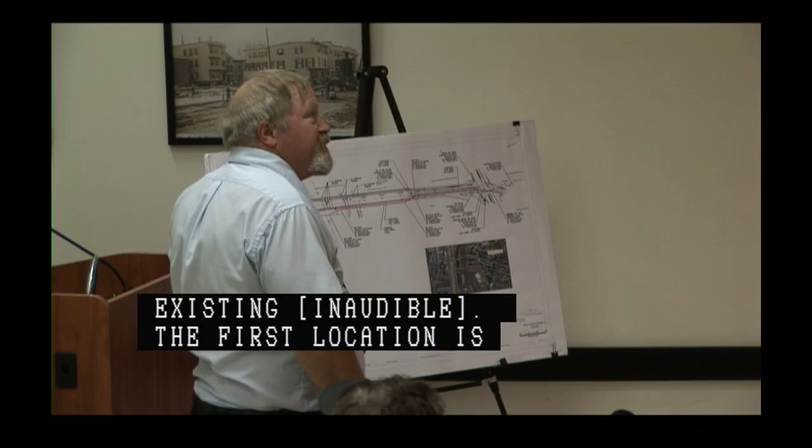This project is replacing existing duct banks that are failing. The first location is West 4th Street. We're going to be going from City of Boston property all the way down to Dorchester Ave.

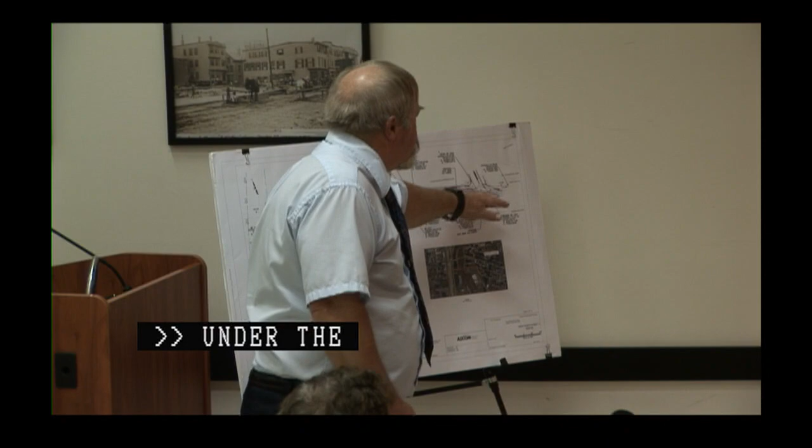No, it's all underground, on the bridge, under the bridge. And you have Mass DOT approval on the attachment? Yes, we've coordinated with District 6.

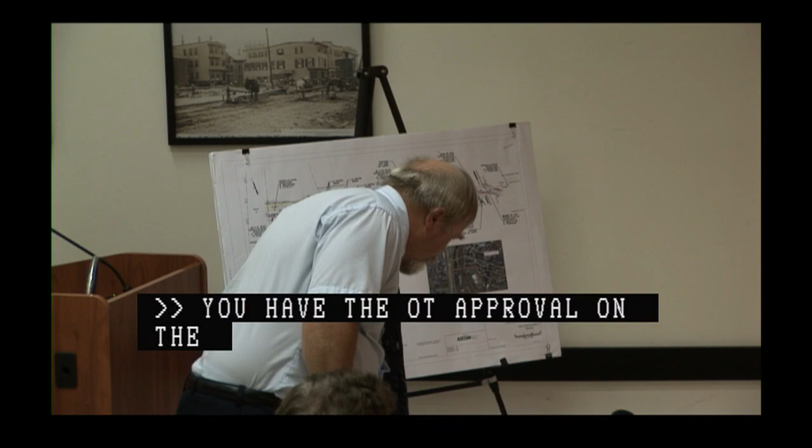I think last time there was some confusion about what was happening with this, with the old line, but this is actually adding additional capacity, and they're still occupying the existing duct bank. So it's not a duct bank replacement, it's a duct bank addition. So basically, the approval that they're seeking here is just for the intersection of West 4th and Dorchester Avenue.

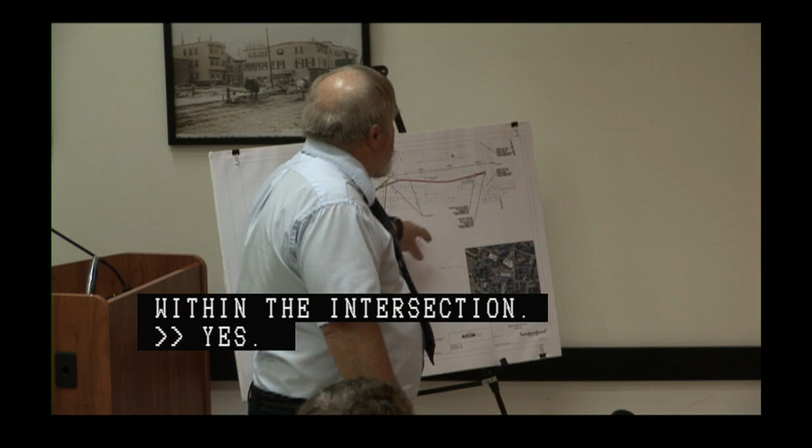Second location is in Dudley Square. Coming off of Orange Street, going through the bus facility, and then Roxbury Street, up to Malcolm X Boulevard.

I know we just discussed this last time, and you've been in coordination, but just as a reminder, just stay in coordination with the city's Dudley Phase 2 project. I've been coordinating with Joe Vazella, and I'll remain coordinating with him through the work. Perfect.

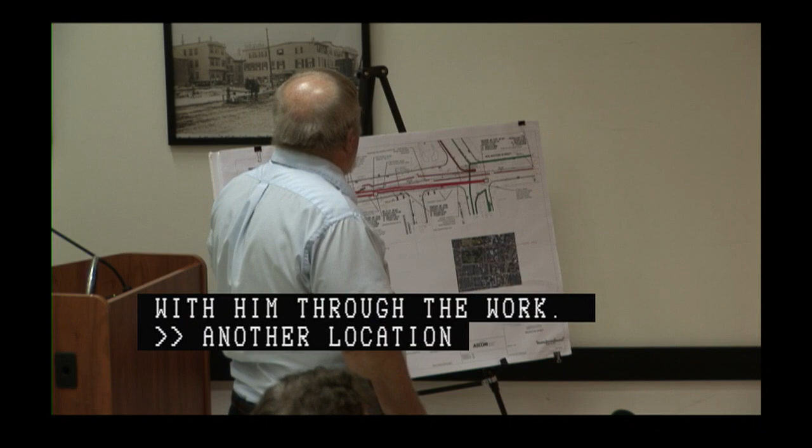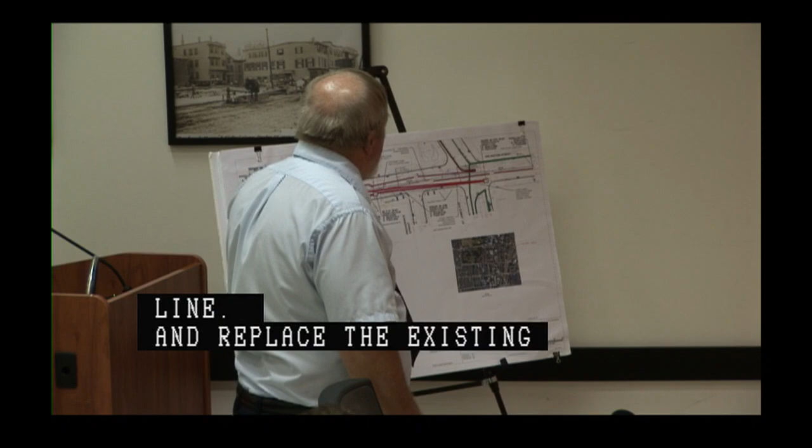And in this one, sorry, the old duct bank is going to have no more cables in it? No, the old duct bank will be used, yeah. The engineer last week misspoke. That's gonna be extra capacity that's needed out in that area.

Right, and if there, for any reason, chief, if a duct bank does become abandoned, they've been instructed to remove it, yes. Great, thank you.

So the duct bank that was just installed is a temporary measure, that will still be utilized? Yes, for the extra capacity. But if any duct bank does become abandoned, they will have it removed.

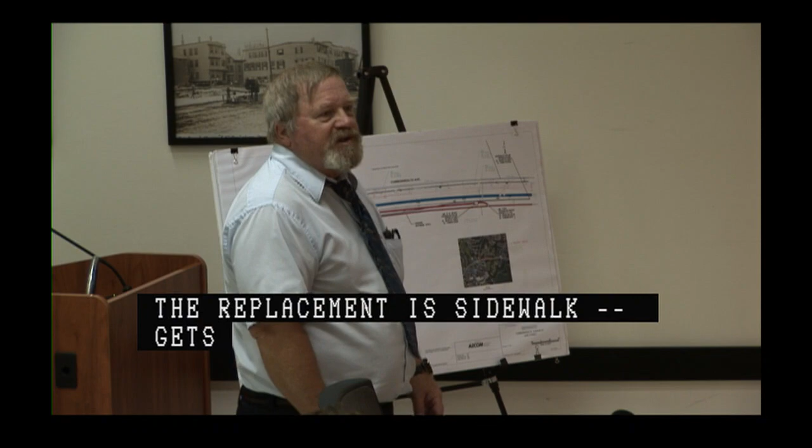I know we talked about this separately, but can you talk about the number of other duct bank work the MBTA does or doesn't plan on doing in 2019 and beyond? Right now, the next phases of duct bank work is under review up at the chief engineer's office, so it's under the planning phase right now. Design hasn't started, even conceptual. As soon as that goes into the queue, I will contact you and give you that list. But for 2019, you should not see us back here with any duct bank projects. Very good.

Other question? Go ahead, sorry. No question? The fifth location is Commonwealth Ave at Washington Street.

Coming out of the existing manhole intersection, going out from under the tracks right now, because under the tracks, between the tracks, we're gonna pull it out to the side, go down in this hardscape, landscape area, back in.

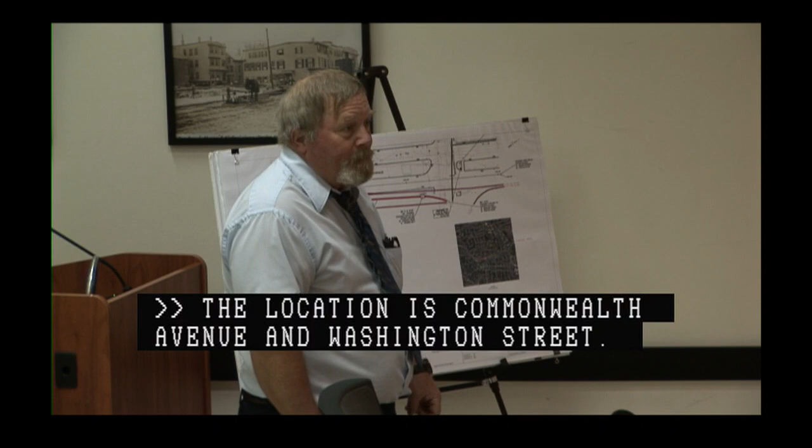So, with this work, is this being coordinated with the track crossings work that we're currently underway? Yes, so we've thought about that and when we're gonna be able to do this versus where you're gonna be. Yes, and I've met with Don Burgess and Al Wilson. I've met with them on both projects, grade crossings and the duct bank.

But I just wanna make sure that internally the T's aware. Yes, absolutely, absolutely. And Jim's, I know you are, Jim, but Jim has been, Jim's one of the directors, he's got both projects under him, so Jim's well aware of both of them. And the same contractor. Perfect.

Jim, you got your work cut out for you. And the last two sheets are the details that were in that set of 10, duct bank configuration and such.

Questions? Questions or comments? So we've sat down with the team and we've come up, went over the construction management plans, hours of operation and stuff, and we're pretty comfortable with what we've come up with. I think there's been a lot of flexibility on the MBTA side, and I appreciate that. And thank you, Eddie, for all your help too, I appreciate it. I know you guys got a lot going on.

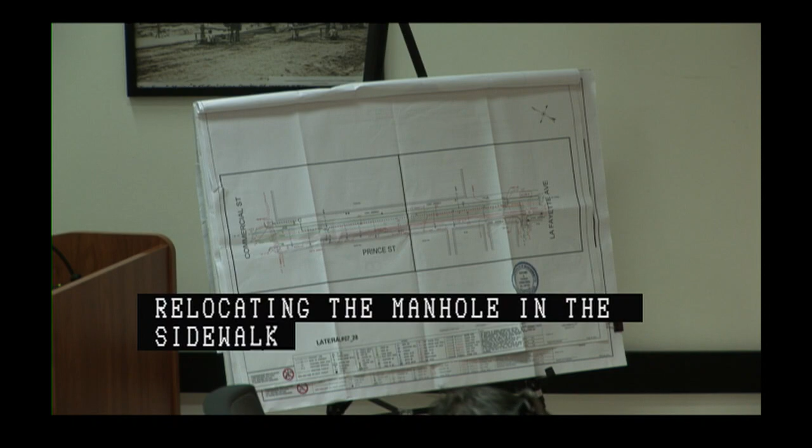Good morning. Chris Murray with the Giamari Group, representing Crown Castle for grant of location on Prince Street. At the July 25th new business meeting, we were asked to look into relocating the manhole in the sidewalk area, as shown on the plan here. After we looked at it more closely, the manhole could not be moved due to a large gas line that runs right next to it in the curb line. So it was agreed that we would keep it there.

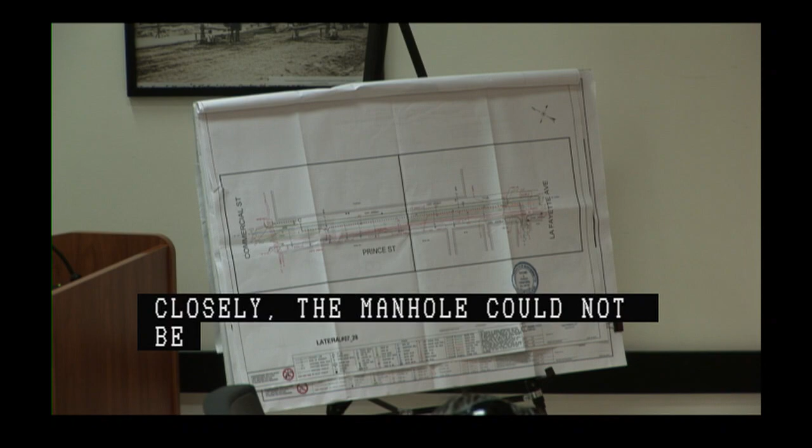Thank you for reviewing that. What's your proposed schedule on this? I don't think we have a schedule yet, but once we get the okay from the department, someone will be down to talk to your department about getting permits. Just keep in mind, for the month of August, the feasts going on in the North End make it pretty much a no-fly zone right now. Gotcha. Make note.

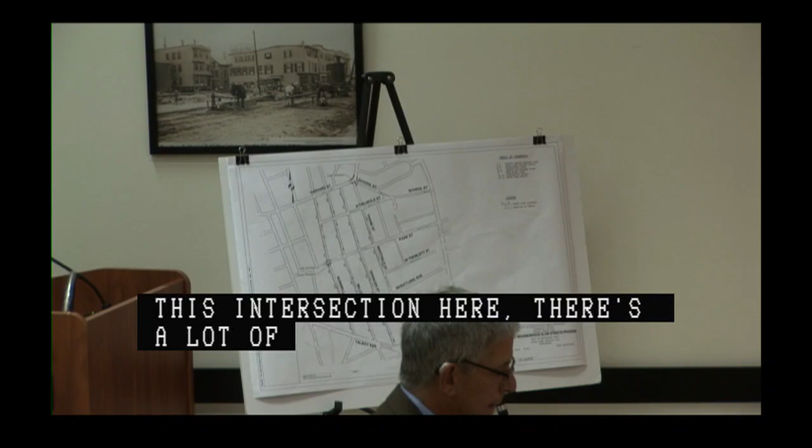There's a lot of pavement at that intersection, and the geometric improvements are meant to try to improve that. There's a raised crosswalk at the intersection of Norwell Street and Park Street. So those are the proposed improvements for the west of Washington neighborhood.

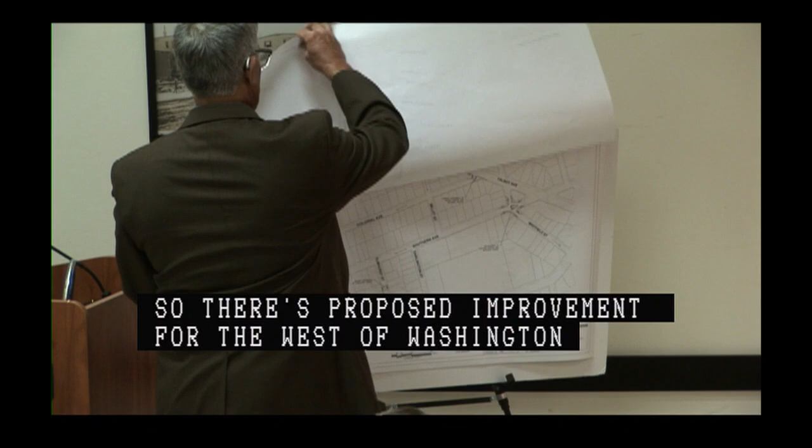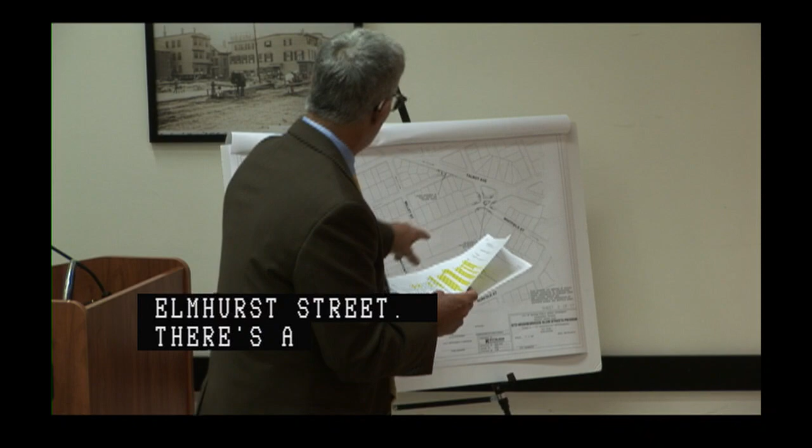We're also proposing improvements for the Talbot-Norfolk Triangle neighborhood. We're proposing a raised crosswalk at Elmhurst Street - there's a park near there - a raised crosswalk and curb extension at Colonial and Talbot, and then a roundabout at Whitfield and Southern Avenue.

So those are the extent of the improvements being proposed. At the last meeting, there were some questions raised that we'd like to address - why some of these are permanent improvements, and it's really for a couple reasons: maintenance, durability, accessibility. For example, where the curb extensions are, we're trying to put the pedestrian out a little bit further into the street in a protected manner, and if you put in temporary fixtures, they're really not as protected as they would like to be or expect to be. And then there's the community expectations from an aesthetic standpoint.

We will evaluate the changes one year after installation, both in terms of the anticipated speed reductions. As Stephanie said, we're trying to get down to 20 miles per hour, and we'll evaluate to see how effective they are. We'll also do in-field observations to see how all of the users of the system will be using them, whether there's any issues with fire trucks or delivery vans, those kind of things. And then we'll collect this information and prepare a memo as to the findings.

What's your quantitative analysis? How are you going about that? Well, the quantitative analysis, as Stephanie said, what we're trying to get to is 20 miles per hour or lower, particularly in the areas where the speed humps are, and we'll see what the 85th percentile speed is relative. We did that beforehand, and we'll do it afterwards.

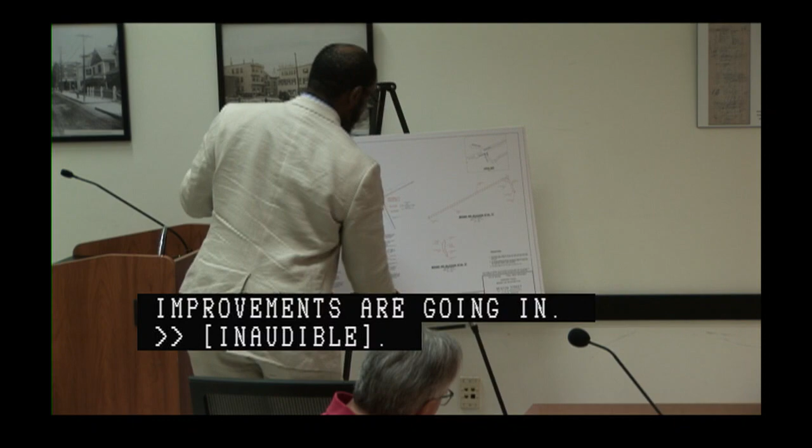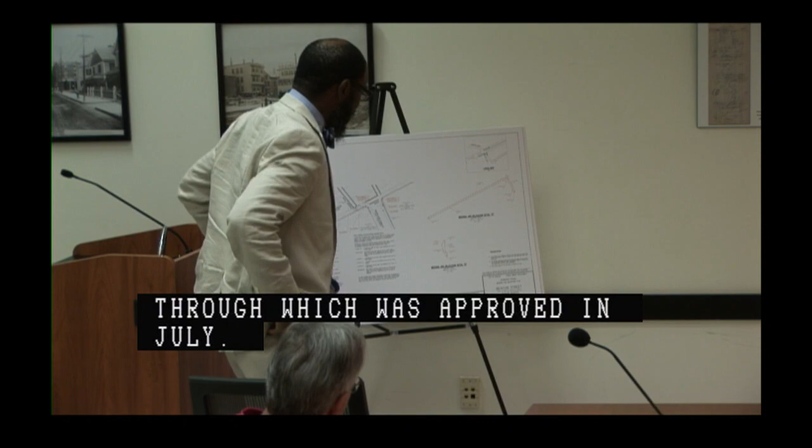I'll start with the widening. As I noted, we worked with BTD from conceptual design all the way through PS&E, which was just recently approved in July, to install signalization equipment on Beacon Street for this intersection. For the widening, there is a 45-foot mast arm at the corner of Beacon and Maitland Street on the Fenway Center / Mass DOT portion of the parcel, which is also within the area that was approved last year as our pedestrian easement.

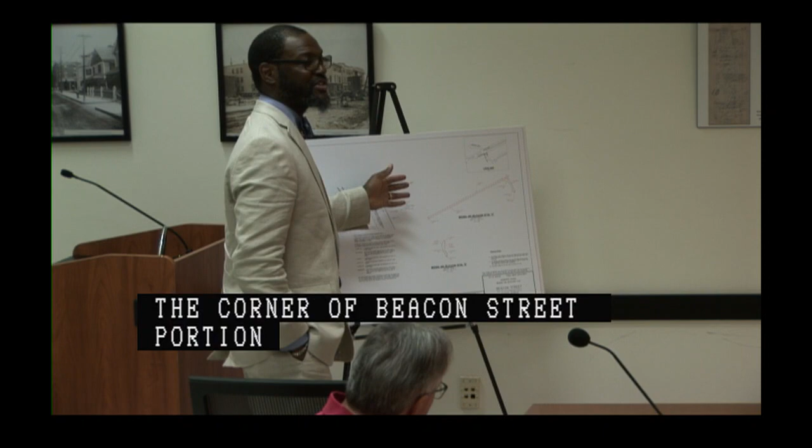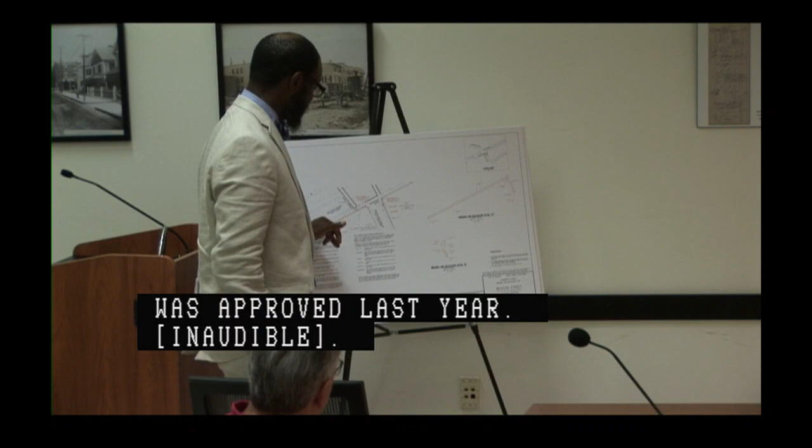In order to put the equipment at this location, we were told to widen this corner to allow for that signal equipment to go into place. On the west side of the Maitland Street intersection, there's a section for widening at every location, approximately 2 feet from every 121 feet, to allow for conduit and 2 traffic signal posts to go into this intersection.

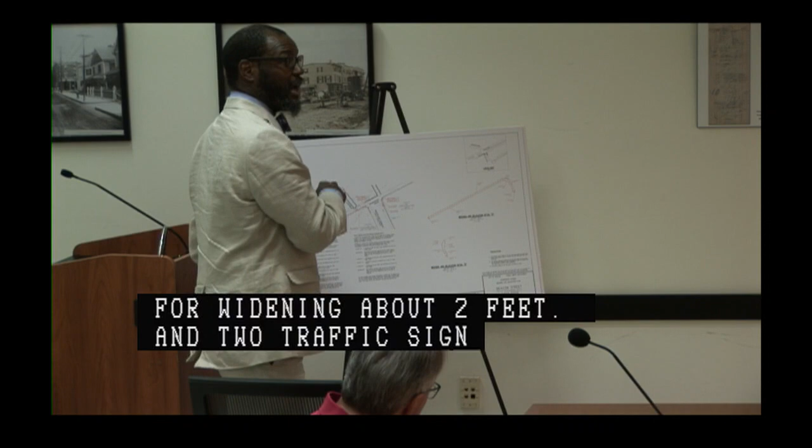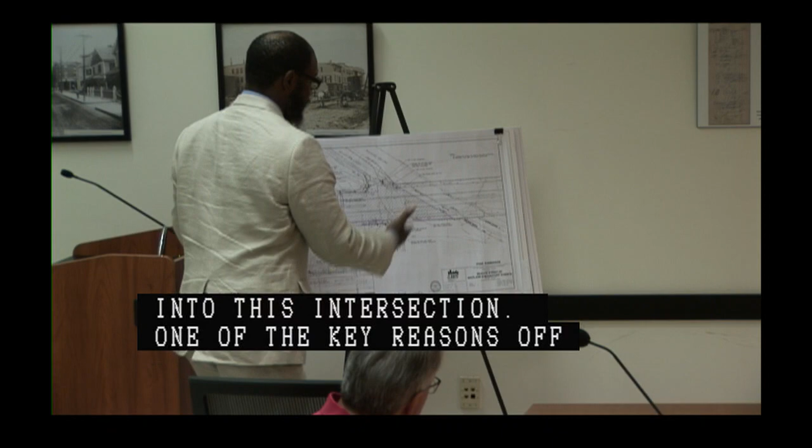One of the key reasons we have to locate this equipment off the road is that there's a vaulted bridge support, which we've coordinated and talked with BTD about extensively. You can see it highlighted here supporting the bridge—it's 2.5 inches below the surface. So we've got our signal equipment located just outside of that because of the foundations required for the pedestrian post, the traffic signal post, and the mast arms, which have the deepest foundation. That's why these two posts are located outside here, because the vaults come right up at this point in the sidewalk.

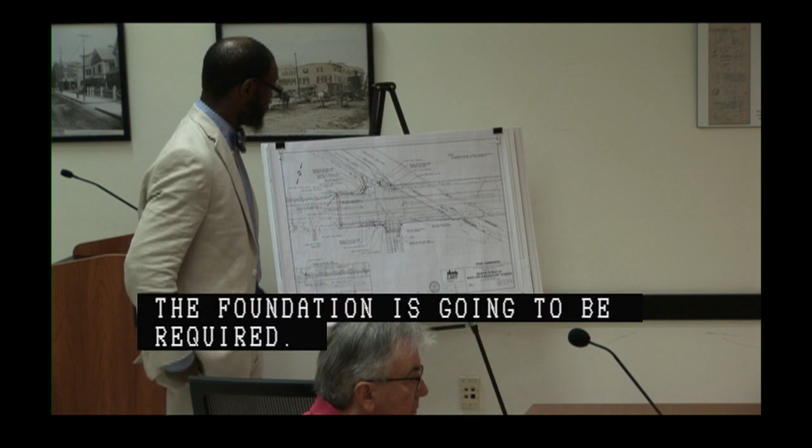You talked to MassDOT as well about it? Yes.

Perfect, great. And the discontinuance for the conduit, are property owners on board with that? Yes, we have signatures from all granting parties. That was Children's? Yes, Children's has a signature. I believe there's a highway easement document that goes along with this that's supposed to be worked out with the city.

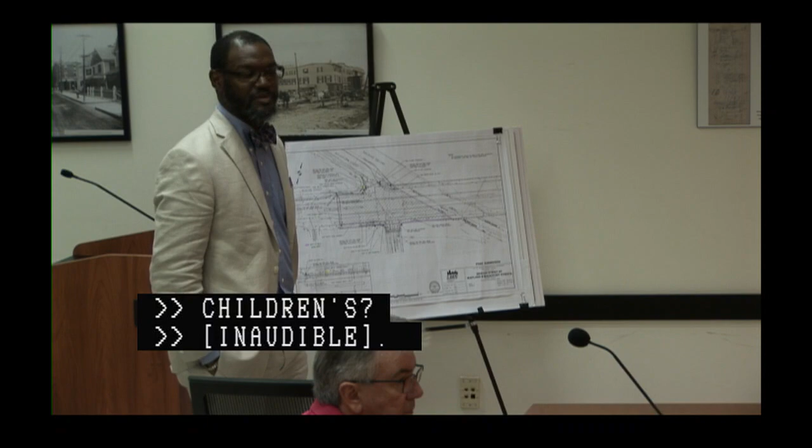And then you talked to the specific repair—I know you covered some of it, but just walk through the pieces.

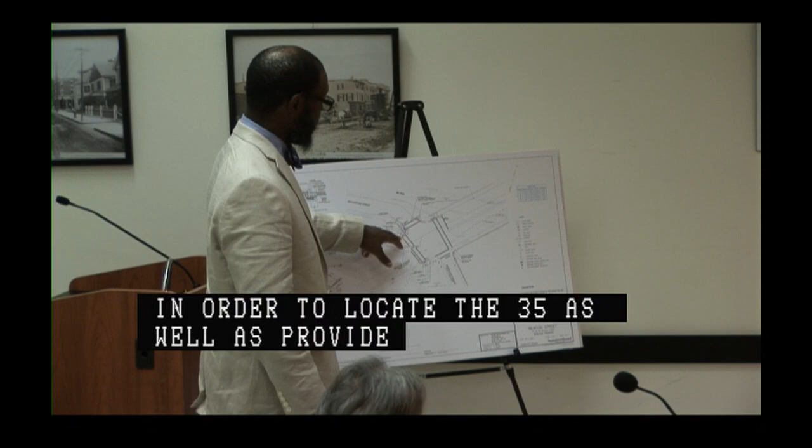For the specific repair, I'll start on the north side of the intersection. In order to locate the 35-foot mast arm, as well as provide adequate accessible ramps and pedestrian signal head posts, we have to build out the corner of this intersection property about 10 feet or so, in order to put 2 accessible ramps at that location.

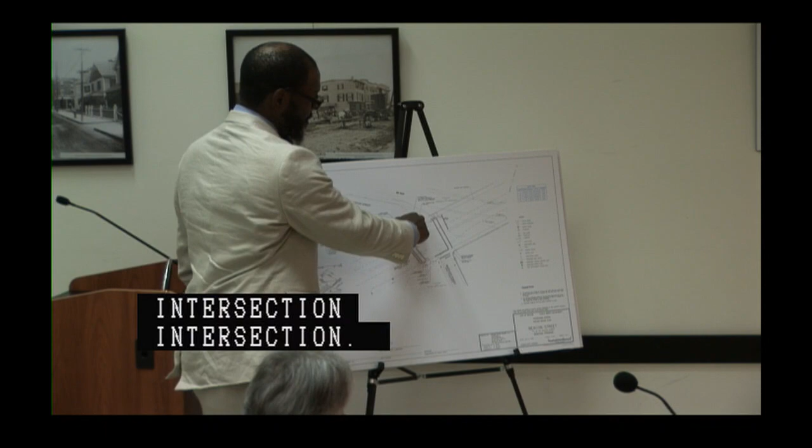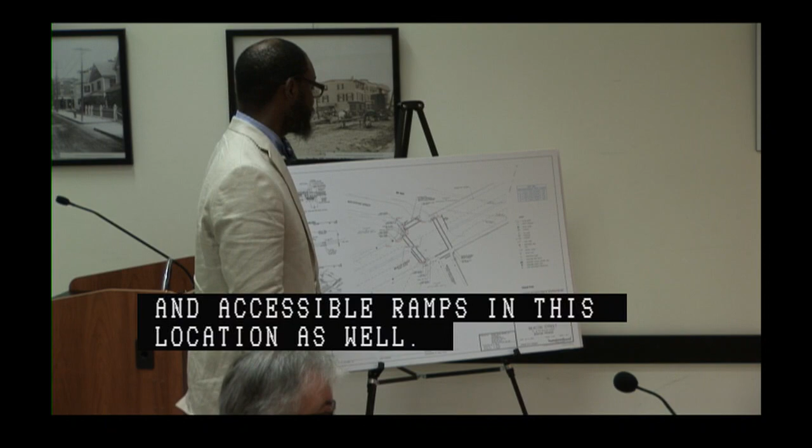This is an existing crossing at this location. We're going to be putting in accessible ramps here, and accessible ramps to get us across Beacon Street at this location as well. We met with the street lighting department, and they've approved relocating this street light. They've asked that we put in a brand new concrete pole and coordinate with them, as well as use the same type of lighting fixture that's out there now when we relocate.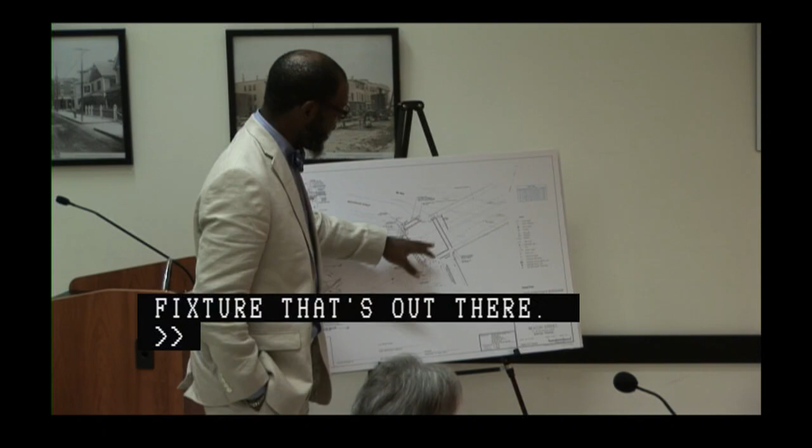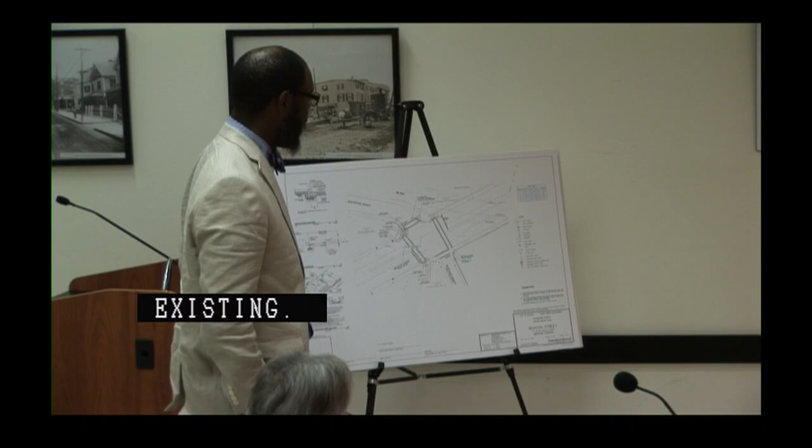As you go east, we've added an accessible ramp on this side as well, and this will bring us to an accessible ramp that's already existing—built under a variance with the AAB back in 2013. So we're not touching those two ramps, as they're already constructed, built, and approved, and we're tying into that location to connect them across the side of Beacon Street.

And then this will be brand new ramps for this crossing on the western side.

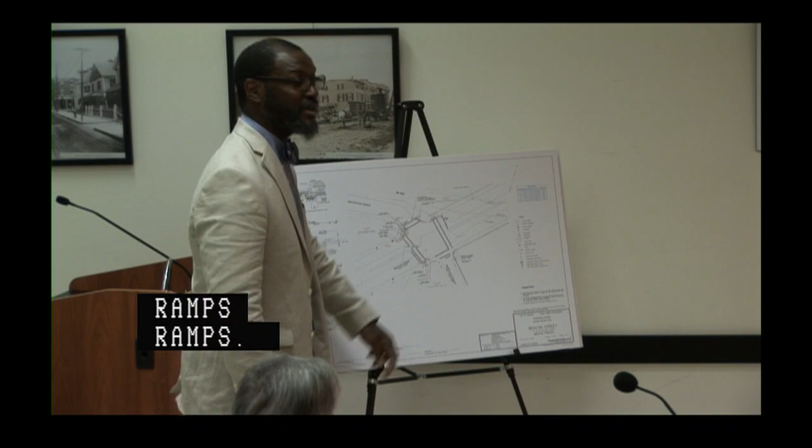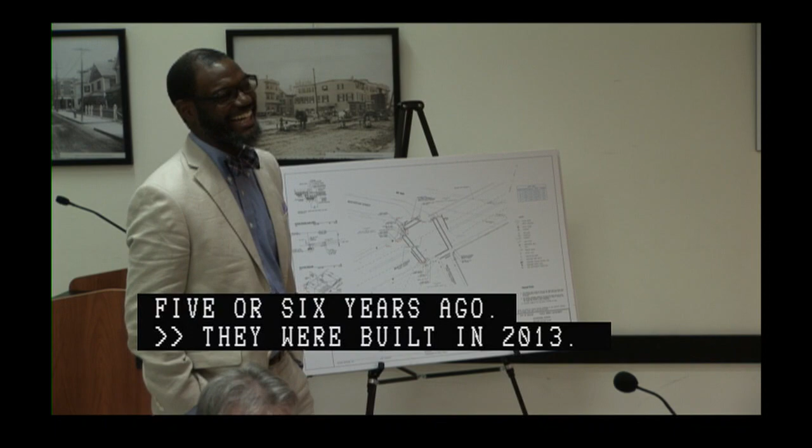Do we know if the two ramps framing Maitland are still in compliance? I know they were probably just rebuilt 5 or 6 years ago, but are they? Yeah, these ramps were built in 2013 and are still compliant with the variance. It's not compliant, but it has a variance—right, for it's not compliant, yes. I'm wondering, as good as it can get with the appropriate variance, if there's been any degradation since 2013 while we're doing some work. Is there a way we can just verify that it's not cracked and the panel's still up there? We'll talk with construction. Terrific, thanks.

Just in the installation of the signals, that's mitigation for the new project. Obviously, we're going to be having a lot more pedestrians in the area, not only with the Fenway station, but a lot of people have been walking mid-block out here, so this is an attempt to get a safe signalized crossing in here, and we appreciate the work that you did here.

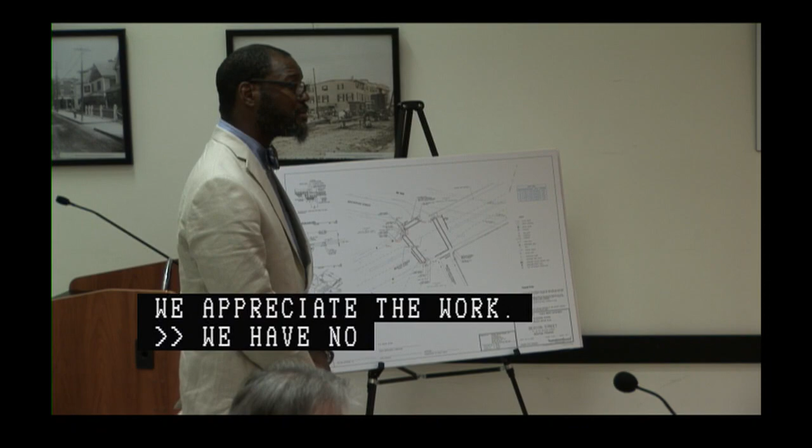We have no issues with the work. Some of our facilities were labeled incorrectly, I can send you that information, it's just for cleanup purposes. Sure, I did see your comment about the sewer. No, it's all right. You know what it is? It's our covers are labeled incorrectly, so if it says it's sewer, it still may be a drain line. That's what the issue is. That's all, thank you. No problem, we'll get that straightened out.

Kevin, you just connect between now and new business on the location of the traffic control cabinet, just to make sure it's in the optimal place for BTD to maintain the signal over time. Probably have it back at the sidewalk, not up at the front face. Okay.

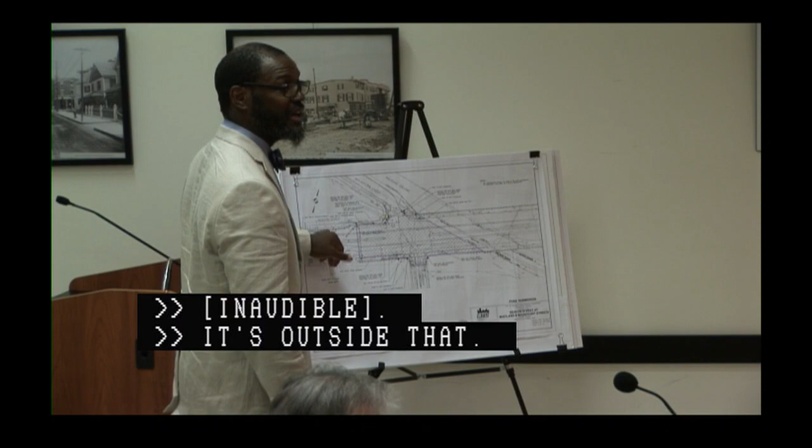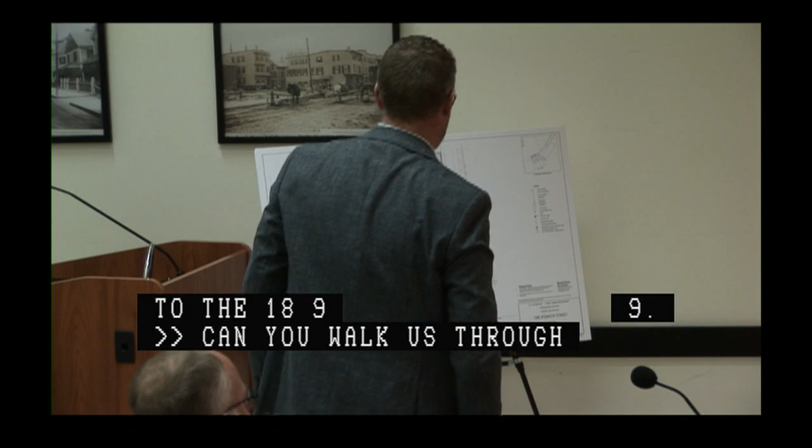Can you walk us through both of the specific pieces, the licensing and the curb cut? Sure. So I'll start with the specific repair plan. Today there is approximately a 21-foot curb cut on Ipswich Street, and we're proposing to widen it to a 30-foot wide curb cut on Ipswich Street. This would be done where the concrete and the pedestrian traffic path has the priority.

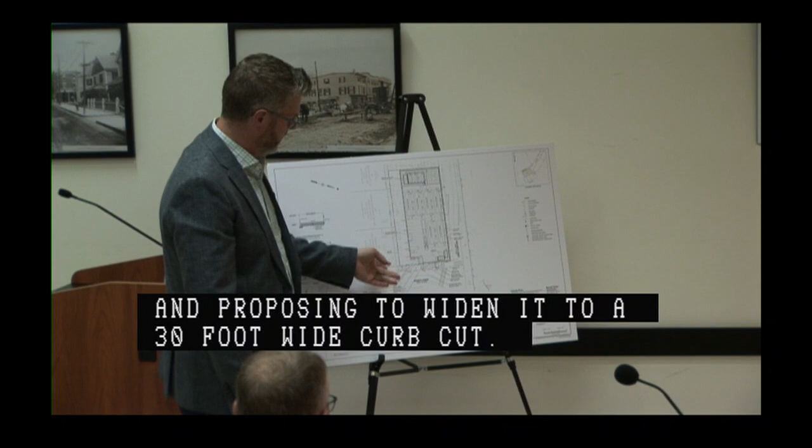Based on comments we received from BPDA staff, they had also asked about an existing curb cut to the south of the one we were specifically talking about, and today that is asphalt, and they had asked that we replace the asphalt with concrete to give the pedestrians priority. And again, the need for the widening is due to the large trucks that are going to be using the lot for that.

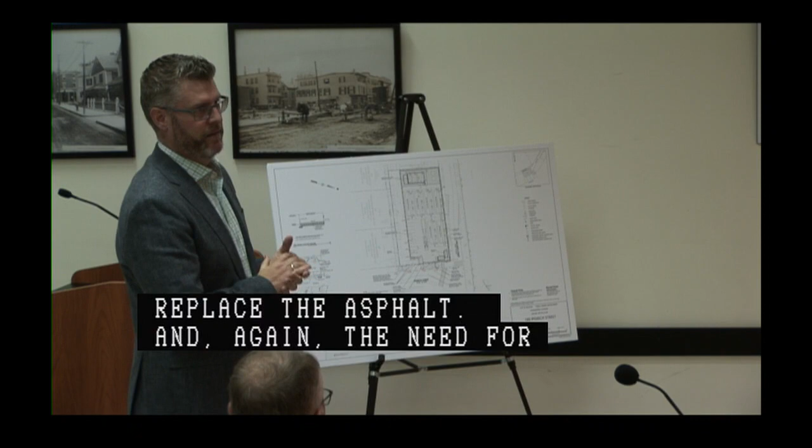Now, are there grade changes to get those vehicles into that lot? There won't be any grade changes in the public way. It's going to have the city standard driveway apron that goes up to the sidewalk. The sidewalk itself will grade from the back of the sidewalk to the street as it does today.

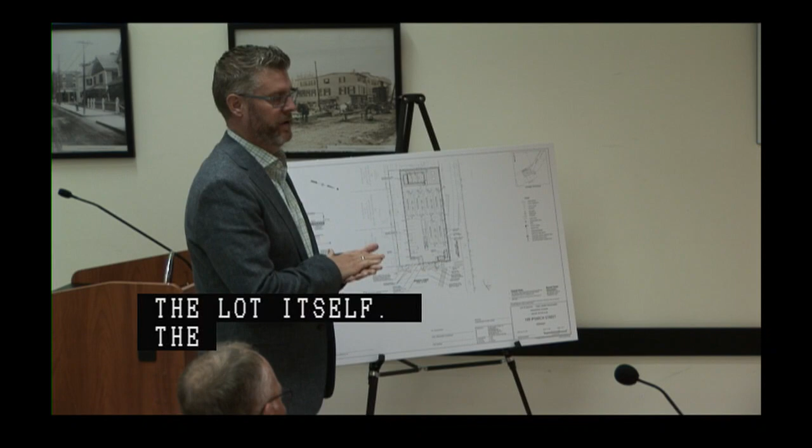There will be grade changes to the lot itself. Today, the lot dives down very steeply. In the proposed condition, we are raising the grade of the lot to have it basically between a 1% and 2% slope, because the broadcast trucks need to be on very level ground. So we will be installing a retaining wall and raising the grade of the lot to accommodate that.

And I realize it's not specific to the curb cut, but how do you anticipate managing the load in and load out of the trucks before and after games? This is, in a wonderful way, teeming with people both before and after a game.

I'll try and answer that. Those broadcast trucks tend to come in before and leave after home stands. They come in once and leave once, and they come in really after hours. Those trucks don't like to drive on the city streets during traffic, so they come in late at night, early in the morning.

And the thought is that each of these trucks tie into this duct bank, which would then connect into the stadium itself? That's correct. Can you walk us through that piece? Sure.

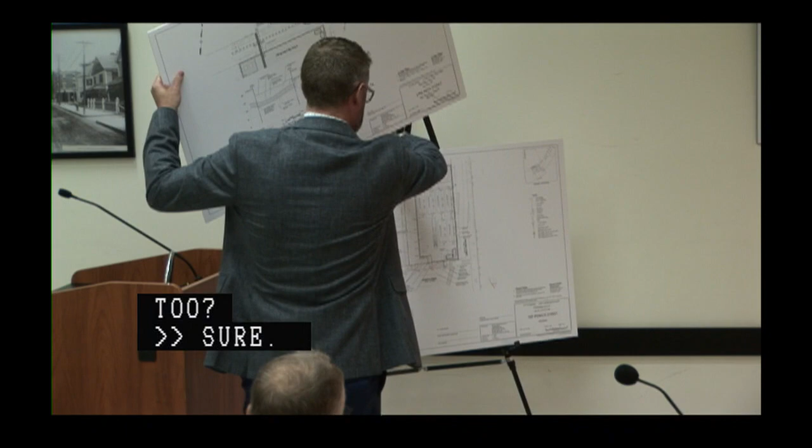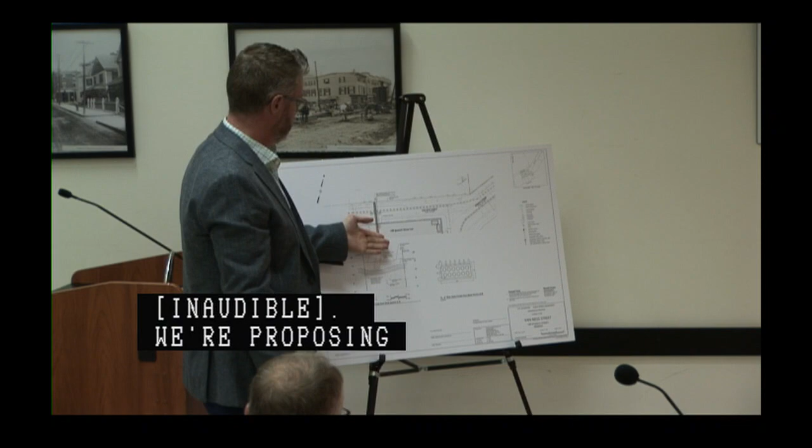For the license location, the license plan on Van Ness, we're proposing 12 6-inch fiber optic private duct banks that would come from the south of the 189 Ipswich Street lot. They would cross Van Ness Street in a perpendicular fashion and would then connect to a room that's going to be retrofitted within Fenway Park to receive the cabling on that end.

And then we also have a small utility building on the 189 Ipswich Street site, right? So the trucks tie into that utility building. It's basically like an IT room, and then they connect from there into Fenway Park.

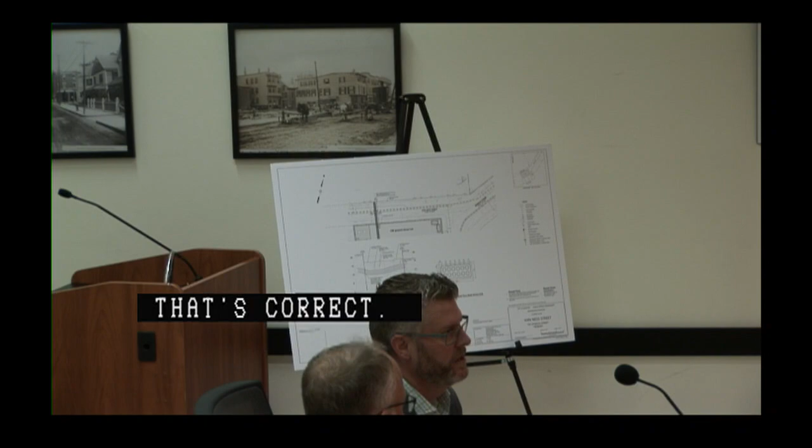So is the intent of this lot also to incorporate some of the local affiliates that currently stage on Ipswich Street? Yes, that's Van Ness, correct. It's for NESN, but also would be for ESPN trucks, and during large events and special games, there will be other broadcast trucks parked in this lot as well. That's good.

Any approval from National Grid or notification for National Grid, given the proximity to the gas line, or no? They've been notified of the work.

Other questions or comments? Yeah, I just have a question about the conduit you're proposing. We have the water and sewer, existing utilities you're crossing. I was just curious how you determined these depths, or how you're planning to determine them in the field. The depths for the existing utilities were based on our field survey, and then we cut a cross-section from the existing conditions information.

So have they been vacuum excavated? They have not been. Okay, so just a total station survey? Yes, and a level run survey. Correct. Other questions or comments?

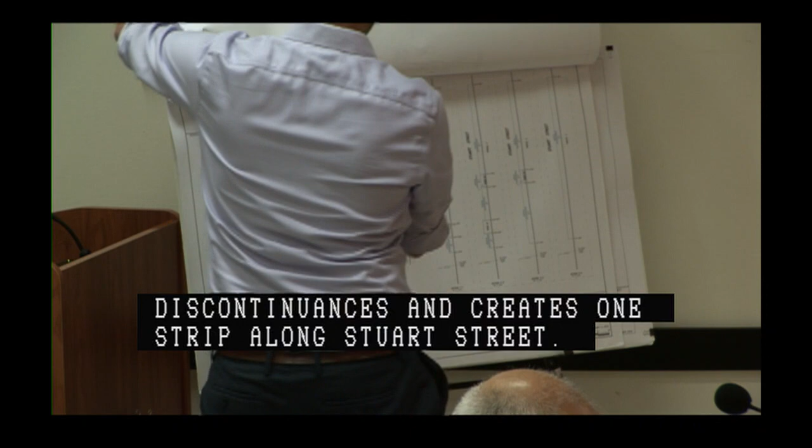So the discontinuance itself starts approximately 24 feet above grade and then extends up from there. It'll have residential space in the building above.

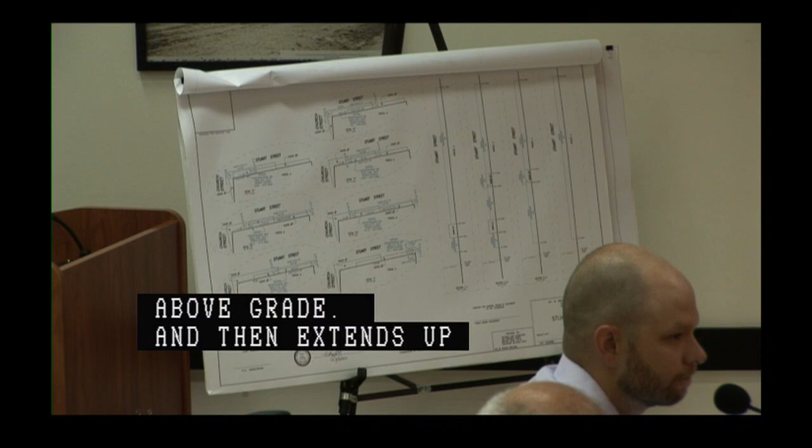How different is this, Chris? How different does this look? If you're looking down Stuart Street, what does it look like from an urban design perspective? Is this jutting out more or less than others?

Peter Spellius with Transom Real Estate. The Revere Hotel actually protrudes more proudly onto Stuart Street than this building will. And just to correct, we've actually agreed with the BPDA and PIC that this is going to be a single discontinuance for the entire plane. That's how we've resolved it.

And what is the discontinuance for? So it's for, the building itself will extend over the public way. All right, I gotta ask the question. So the portion of the building that hangs over the public way, what is programmed there? It's going to be residential space. So it's not an electronic billboard or anything? No.

Thank you. Would you like one? No.

Other questions on the discontinuance? All right, so we'll move on to specific repairs then.

So starting with Stuart Street, we're maintaining the approximate curb line along Stuart Street, making some minor modifications at Church Street just to round it out a little bit better than it is today. There's a small bump out that exists at the edge of Church Street, going from left to right on the plan. We're extending that out just a little bit to clean it up, and then we'll follow the existing curb line down. The improvements in the sidewalk are basically a new concrete sidewalk, a new curb cut that's 13 feet wide, new vertical granite, and new trees. We're just removing and resetting the streetlights, and then adding new ped ramps to go along with that.

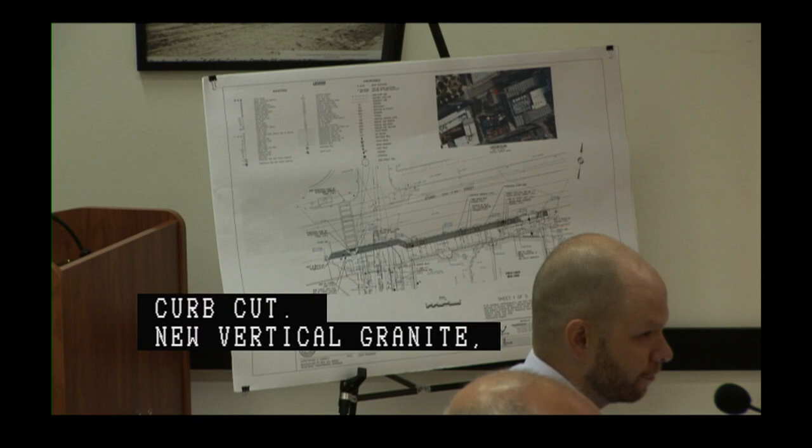Did you receive my email on this? Yeah, so the original email you got said we were pulling out that bump out to meet the new cycle track dimension. That work is not happening, so this is essentially just leaving the existing conditions so that when we come through, it's the same as it ever was.

I think this bump out is kind of important to the neighborhood. So the notion of just removing it as an interim condition, is that what we're saying? We're not changing the existing condition at all, we're just getting it reconstructed in place, rather than modifying it to try to get us to the cycle track condition or that cycle track curb line.

The curb will be relocated when we come through with our project, but this is exactly what's out there today, with just a little bit of an extension to get to the catch basin. And then to try to minimize any future work that has to be done, we have a flush curb that's going to run along where the new curb should be. We'll have to move the ramp, but everything else should be able to stay where it is.

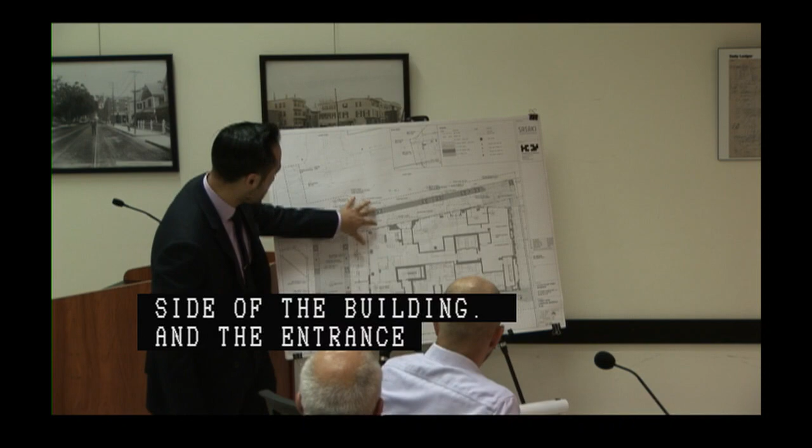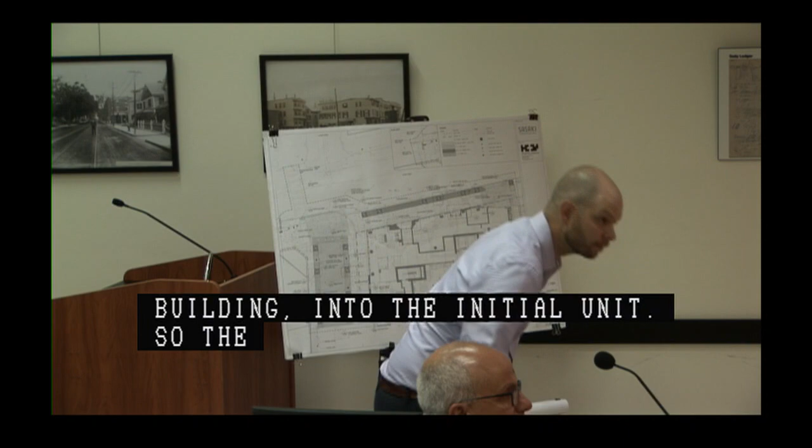My name is Kevin Lee from Sasaki Associates, we're the architect of record. Essentially, we have two entrances on Stuart Street. We have the retail entrance towards the eastern side of the building, and a loading dock here. The entrance into the residence is towards the western side of the building, with the lobby facing out into the Church Street lawn. On the south side of the building, we have two entrances into individual units, with some exits coming out of the building as well. And then the new curb cut is right here. Yep. And there's a concrete sidewalk that right now splits the buildings, right?

Right, okay. And it's metered parking? What's currently on Stuart Street in front of where your new entrance would be—is that metered parking? No parking at all?

Got it, okay. I think we'll likely get a fair amount of pickup and drop-off, so we should be thinking about how we actually manage that in the design.

After some conversations with the Parks Department, we are modifying what is happening in that little Church Street stretch so that we can maintain some existing trees rather than removing them. Can you walk us through, Chris, the detail of the Church Street plaza? As Amy just said, there will be some changes, especially to the trees, particularly on Church Street.

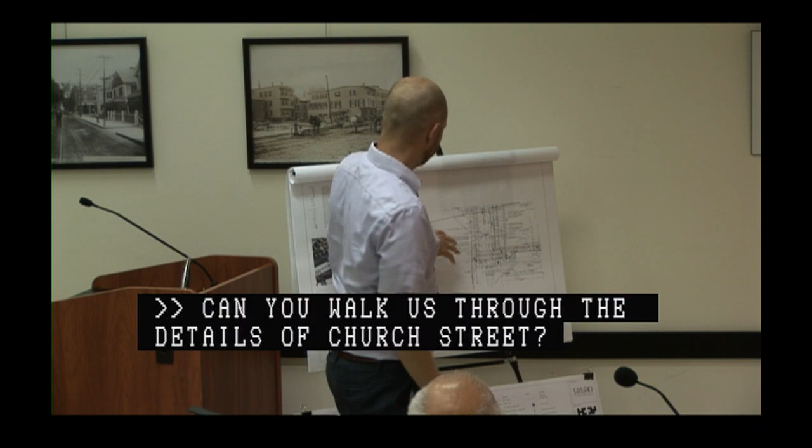So Church Street today, and in the future, is basically a pedestrian road. We're going to maintain vehicular pavers up and down Church Street, and it will maintain emergency vehicle access. It'll all be graded less than 2%, so it's going to be a pedestrian plaza.

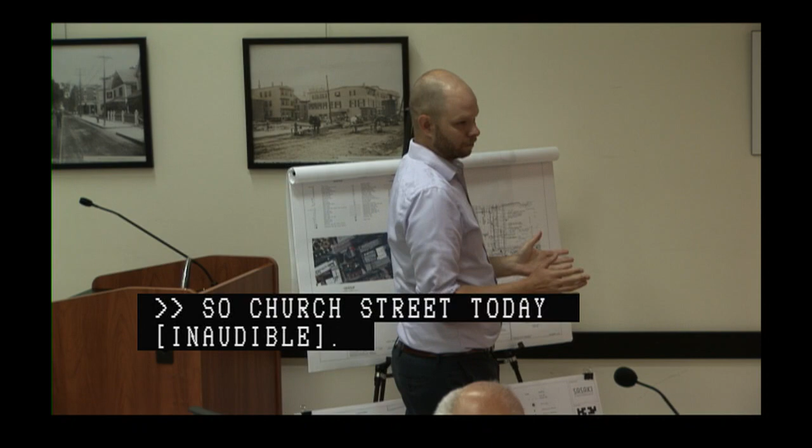There will be trees in there, that's sort of up in the air right now, and there's going to be a large path sidewalk on the east side. And as we said, the building was moved over, so the public space is still extending out to the private property on that side—pretty much very similar to Stuart Street, relocating streetlights, new trees, new concrete sidewalks, and new pavers.

And it's all pavers in this stretch in the Church Street Plaza, essentially. In the Church Street Plaza, yes, there will be a concrete sidewalk on the east side. So one thing we should talk about is an LMA for the pavers themselves, if they're not a standard detail. Perfect, thank you.

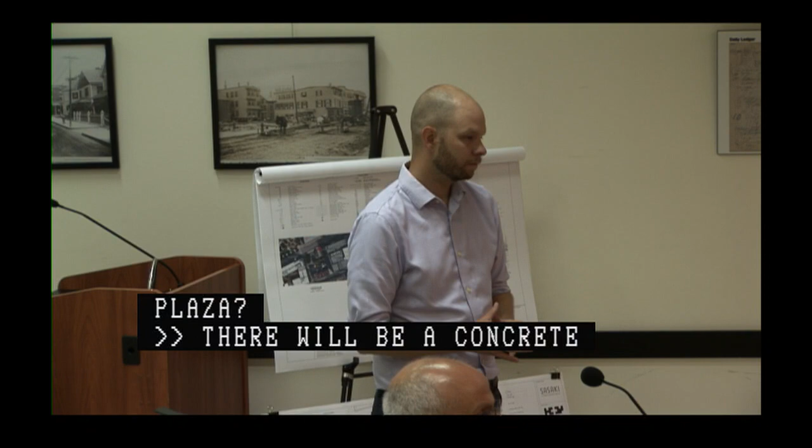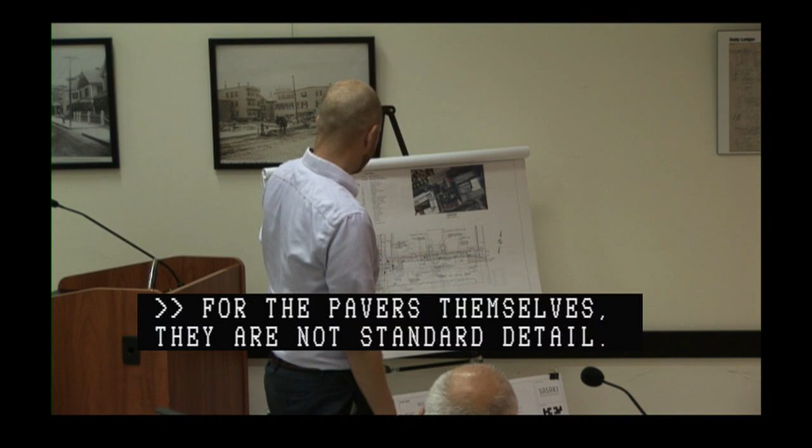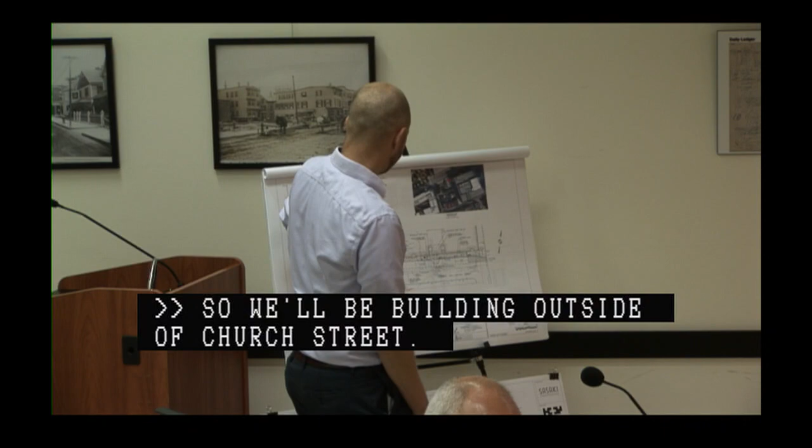And then the curb basically goes back to where it was, with a small bump out for every tree. There will be 4 parking spaces along, just city standard concrete in this area, and then we'll have 2 new trees.

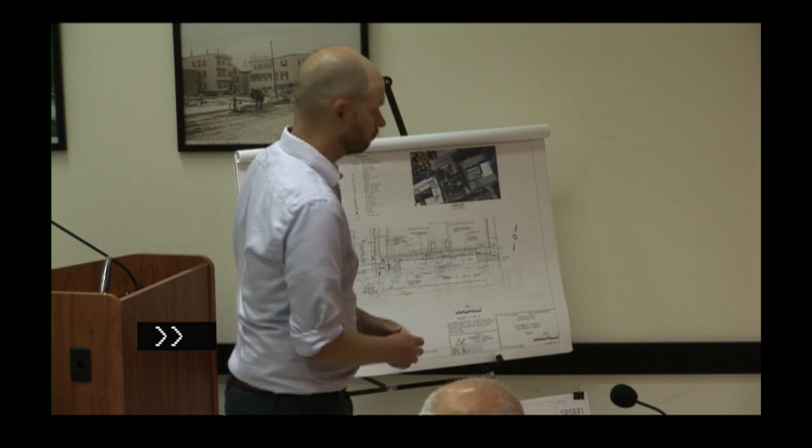So we're also here for 2 new canopies on Stuart Street. And these canopies are a minimum of 12 feet 1 inch above sidewalk grade.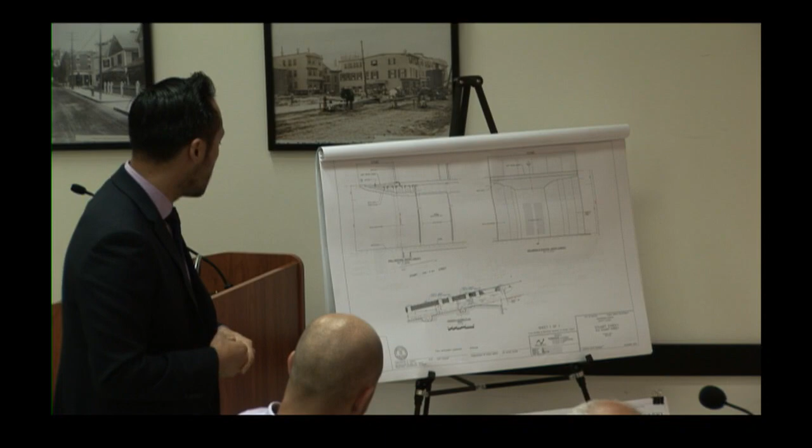Can you talk a little about the design of the canopy itself? The building, as you may know, the exterior of the building is a precast concrete building. In order to mimic the same kind of language throughout the building, what we decided with our design architect, Howard Yoon, was to create 2 precast concrete canopies. We feel that these reflect the nature and design intent of the building, and provide an interesting element to Stewart Street.

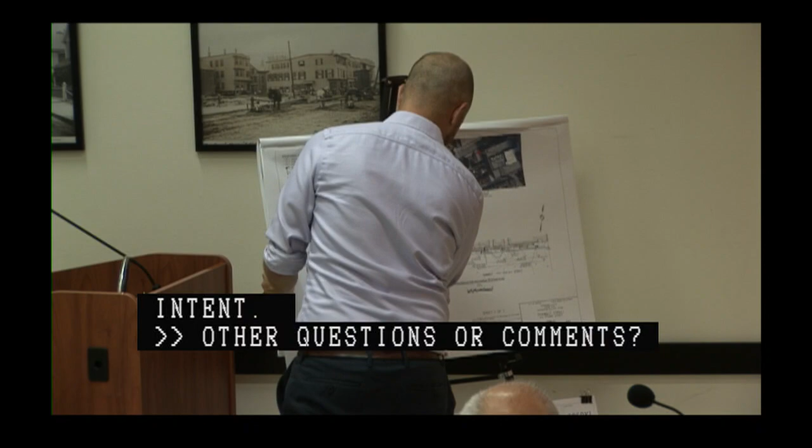Small caps in the sidewalk for access for maintenance in the future. So the tank is in the building? Yes. Great.

And that plan is still being reviewed by BWSC? Yes. Yeah, we have comments. We're addressing them and we'll get them back to Boston Water and Sewer.

Okay, great, thank you. I know the contractor submitted the construction management plan and is going through some final revisions on that, so it's been good progress. It's gonna be a tough build, but a good plan. Thank you.

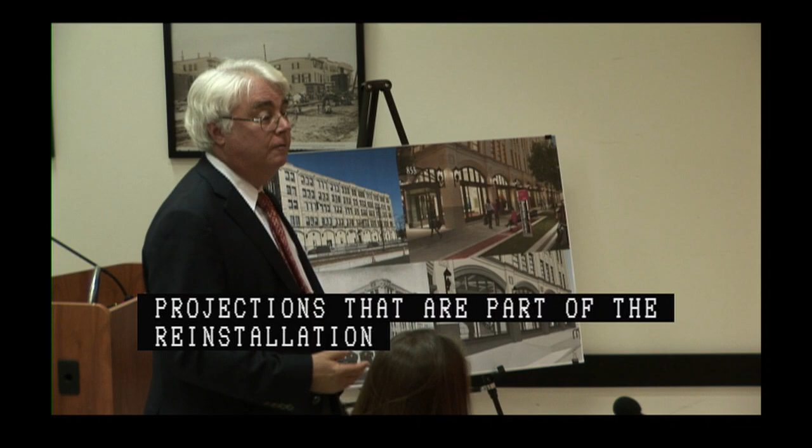install some projections that are part of the reinstallation of the glazing. The projections have been reviewed and approved by the BPDA, and a specific repair is assigned to the planting bed that is part of the Commonwealth Avenue Phase 2A design. Chelsea?

Good morning. So the actions we have before you are the specific repair for the sign. It's about a little less than 6 feet high and 1.5 feet wide, to be installed in the grass strip that's currently under construction as part of the CAP 2A project. The canopies themselves are about 11 feet above the sidewalk and only about 9 inches over the public way.

It's a sort of static wayfinding sign to mark that this building is the College of Arts. It's static, it's not illuminating.

Do you anticipate more of this type of signage throughout your campus? There may be something associated with the data science project. Well, I'm just thinking that if this is going to be a continuous signage kind of program, we would get you under one agreement and all of your signs could go in one signage agreement, and you can add to your inventory.

Typically, these signs are on university property, up and down the avenue. We prefer to have it there. You have no need here.

Looks like the sign's placed in a forest. Where the sign's being shown is in the middle of all the trees. Well, it's in the grass area. This area is not fully complete, but yes, there's shrubbery to be installed as part of the landscape plan for CAP 2A, but there aren't actually trees around it.

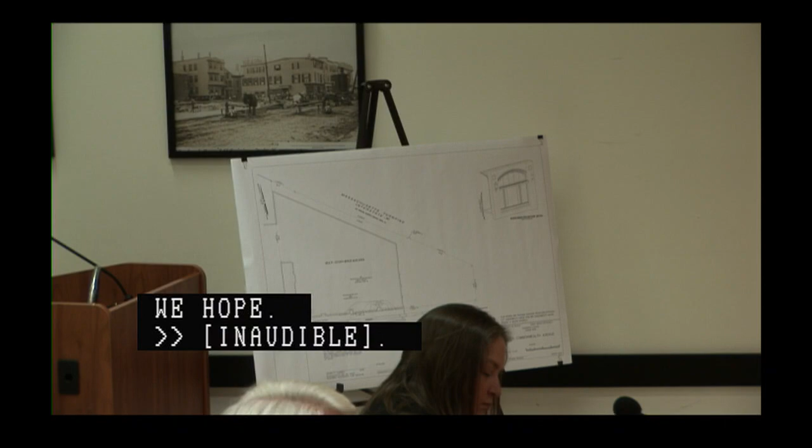Thank you for bringing the windows back to this project. It's a great project.

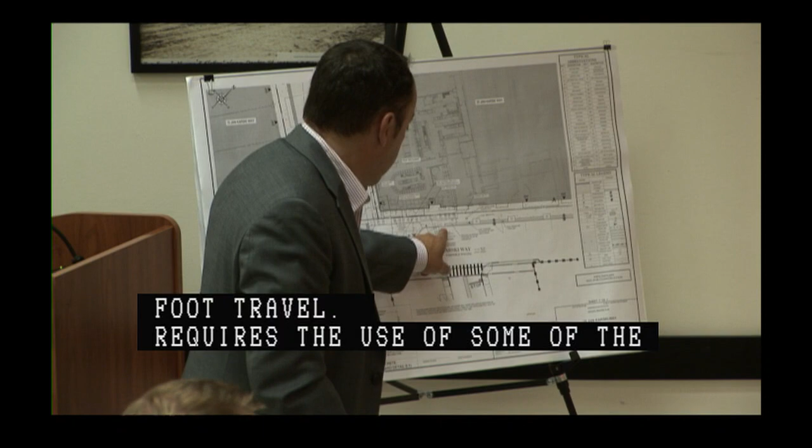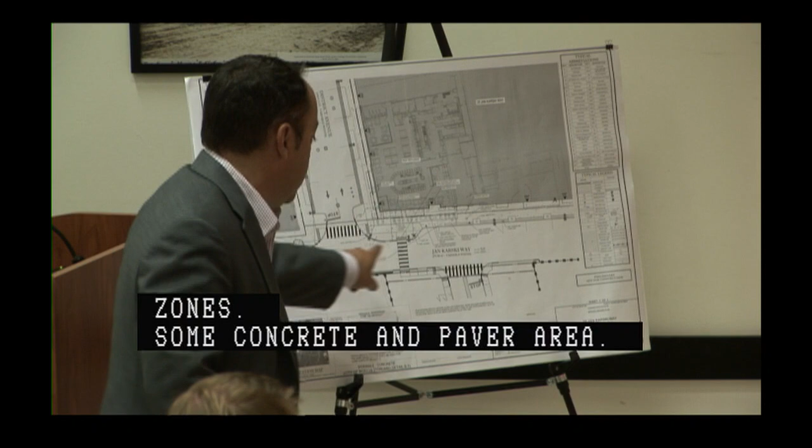Perhaps a question for Sarah or for Amy, but on the eastern edge, it looks like in order to get that 5-foot clear path of travel, it requires use of some of the furnishing zone. Is that—yeah, exactly. On the far edge, the 5 includes some concrete and some paver area. So this paver stretch would be replaced, you're going to take that up because it's all concrete from the tree pit, and then the pavers start here, and we have landscaping in this area. The tree is going to the other side of the district.

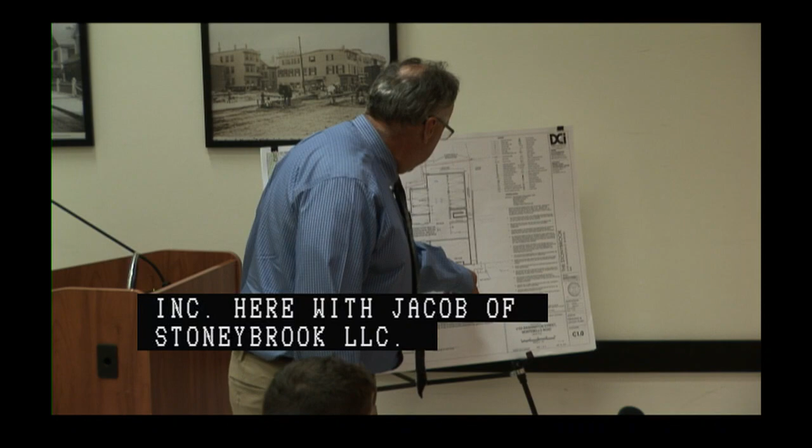mixed-use development, 46 residential units with three retail spaces on Washington. Currently, there's a curb cut on Washington that'll be closed up. There'll be a new curb cut on Montebello to enter the parking garage that ramps down into the parking garage below, where there'll be 20 parking spaces below grade.

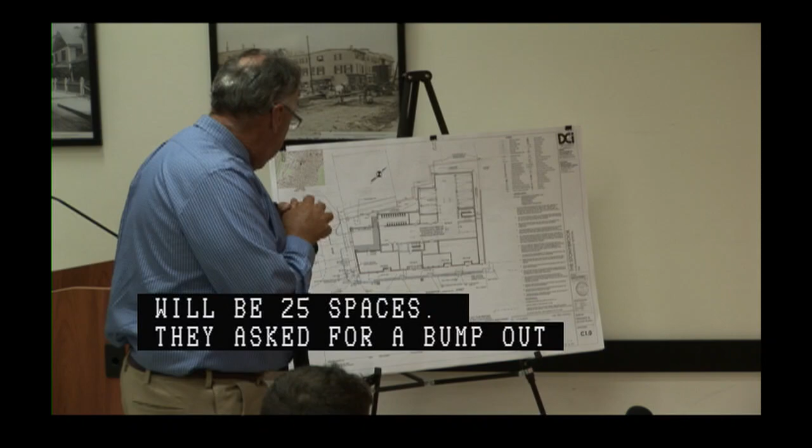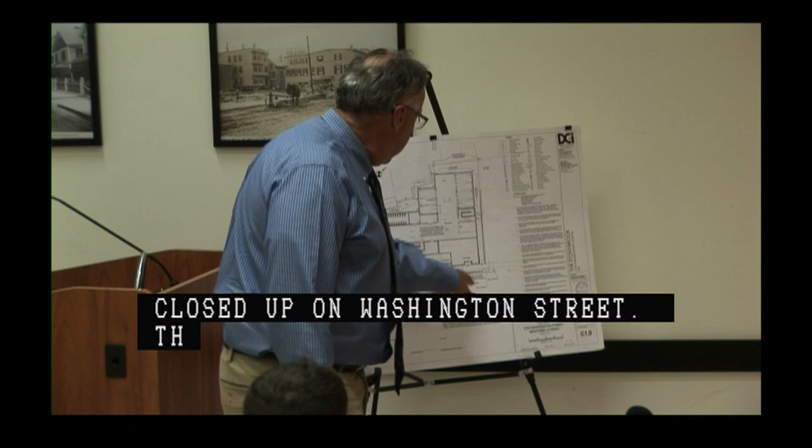As part of the BPDA process, they had asked for a bump out at the corner of Montebello and Washington, which we provided. With that, we've added one tree on Montebello, and a tree where the previous curb cut that's closed up on Washington Street. There are two trees on Washington that we're going to maintain, and then there's a third tree on the property line that'll be maintained.

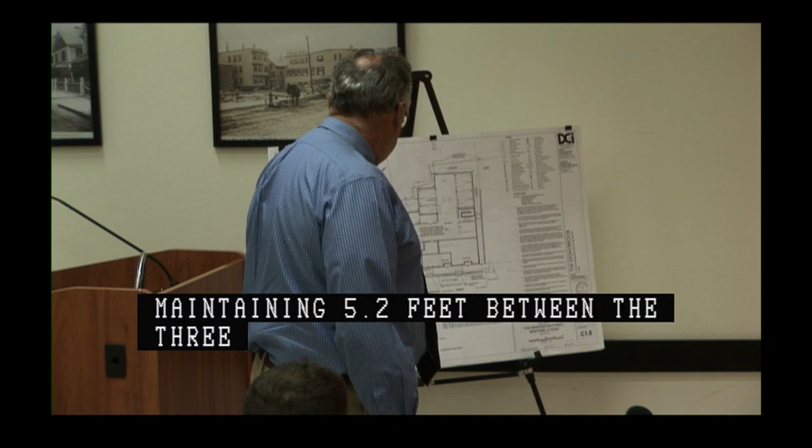We are adding a permeable paver strip between the tree boxes. We are maintaining a minimum of 5.2 feet between the tree box and the building. And there is a traffic control box, and that measured distance is actually 5.2 feet between the building and that traffic control box. There is a traffic signal that will be pulling out

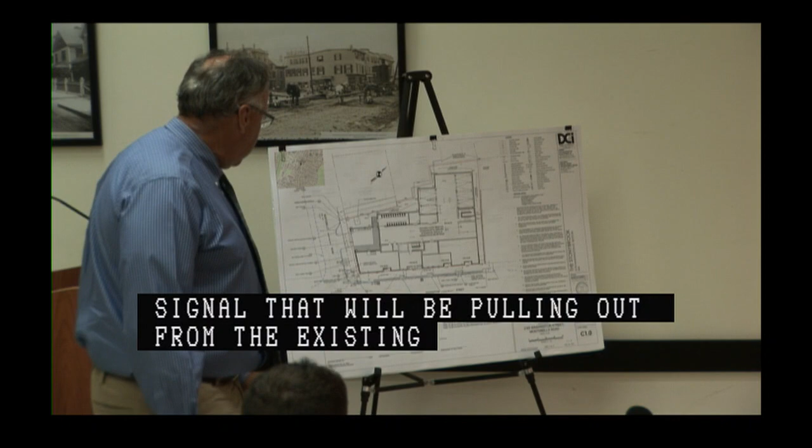from the existing curb line, pulling it out probably about 3 or 4 feet, setting at 18 inches off the new curb line. We did run turning movement, SU-30, to make that corner.

One thing we do recommend is to add no parking from this location to the corner. Montebello is one way. They do park on both sides of that street.

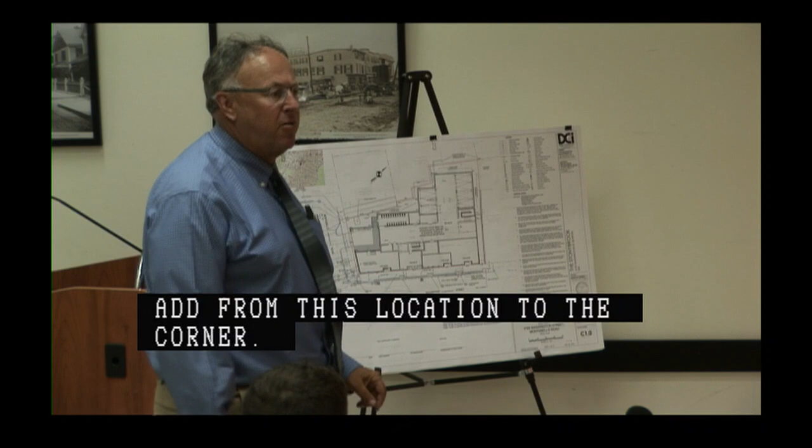So who did you run that turning movement analysis through in the transportation department? Yeah, we did that, we just ran that the other day. It's just an SU-30 simple turning template.

We have buses, basically school buses, that go down here, right? Yep. So again, what precipitated the neck downs? Who did you talk to at Public Works and Transportation about this?

Unfortunately, the submittal was submitted by another engineer in the company, and I'm going to come in because I have some big-time concerns on any neck down, okay, with basically getting our school buses in and around, not to mention SU-30, which is your basic trash vehicle.

And pulling out the curb and relocating our traffic signals, who have you talked to on our signal engineering division? I'm not aware that that's going. That needs to happen. Yeah, that needs to happen.

It's nice to have the discussion with BPDA, but the people that make the decisions and approve the design sit right here. Absolutely, okay?

So you should set up a meeting with the transportation department. We'll do that right now. Yep, thank you. It's useful for us to start with this intersection, probably just Forest Street, Montebello, Washington.

So this is under construction right now. We also have the project across the street. Yeah, there's a lot going on.